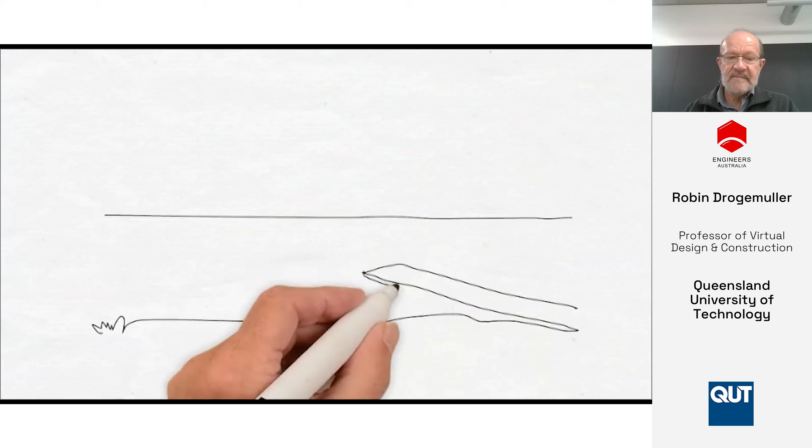Value from the customer's perspective. The continuous elimination of waste and the creation of value flow with minimal waste and without interruption. In Lean, value is always defined from the customer's perspective. In this example, the truck has no value, only the product.

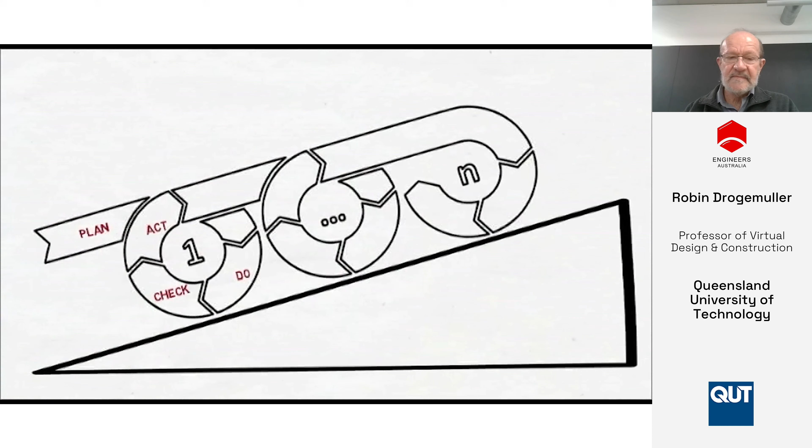Most within CIMIC will be familiar with the Plan, Do, Check, Act cycle, but many also misunderstand its meaning. I like to illustrate it like this, since within Lean you must continue to iterate through PDCA until you reach success, using standards as a wedge to ensure that your hard-earned improvements are sustained.

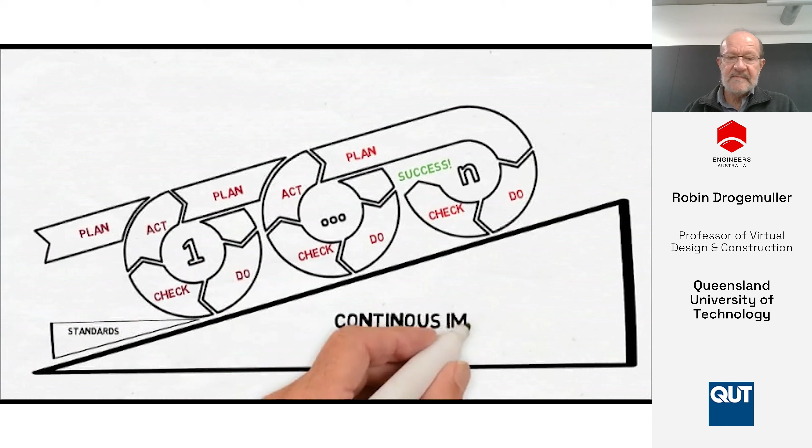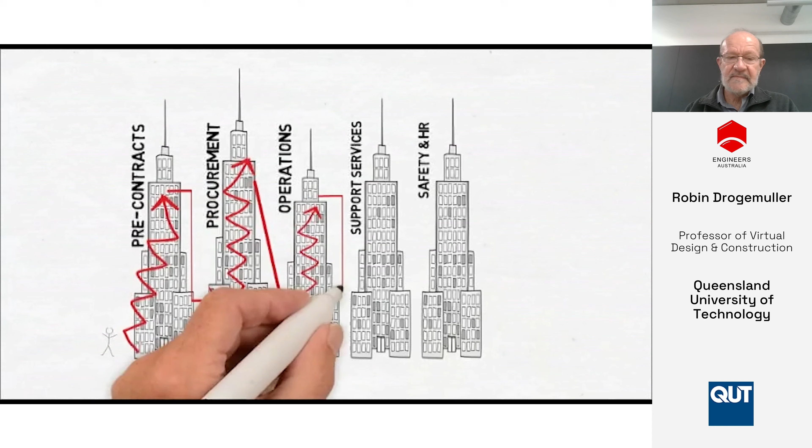Lean also teaches us to recognise that while most organisations and teams are vertically aligned within discipline-specific roles, the process is rarely contained to a single team. The flow of work or value through the organisation is often chaotic, having to travel up and down multiple structures before success is reached. Lean uses tools such as value stream mapping to streamline flow horizontally across the organisation.

Lean takes a very hard view of waste, defining it as anything that does not add value for the customer: motion, the unnecessary movements of people; waiting, time wasted waiting for someone or something; transport, the unnecessary movement of products or materials; defects, efforts caused by rework, scrap or incorrect information; over-processing, doing it better than required; and overproduction, doing it more than is required by the customer, which leads to inventory, the excess of products or materials; and lastly, non-utilised talent or wasted human potential. What's left is value.

One of the concepts Ken was talking about, the customer, can be confusing to people. With a project, the project client is a customer, the person paying the contract and the money, the project owner if that's different, then the users of the project, and also the approval, the council, local government, and the certifiers and so on.

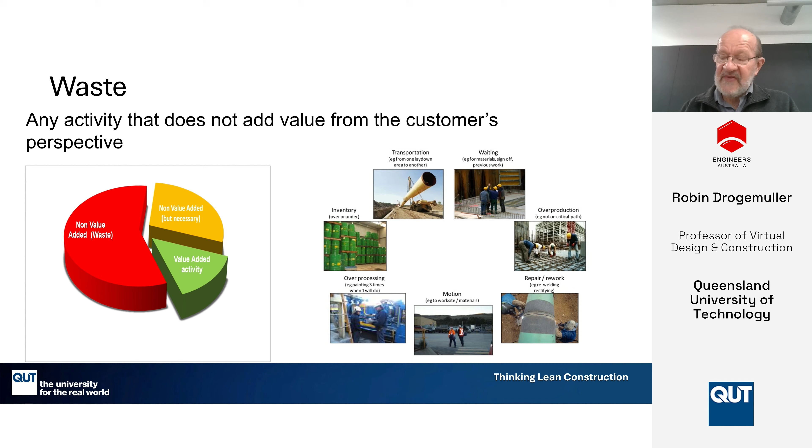The project I'm talking about was originally called Driver District Centre. It's at Palmerston in the Northern Territory, near Darwin, and we'll be using this as our initial case study. It's now called the Palmerston Senior College if you want to look at it on Google Earth.

Looking at some of the background in the Northern Territory—a very tropical environment, hot and humid. Many of the schools were designed as unitary buildings, which basically means the whole project needs to go in a single stream.

Damien Berger, an architect working with me in the NT government, designed the Sanderson Middle School. This was on a slight hill, so it was simpler and more appropriate to break it up into individual buildings. Damien did the initial design, and then Linklater Eric did the detailed design documentation on this project. This actually tested out some ideas we then had to use when we went on to Driver District Centre. I'll talk about the reasons for that in a minute, but hopefully you can see the similarity.

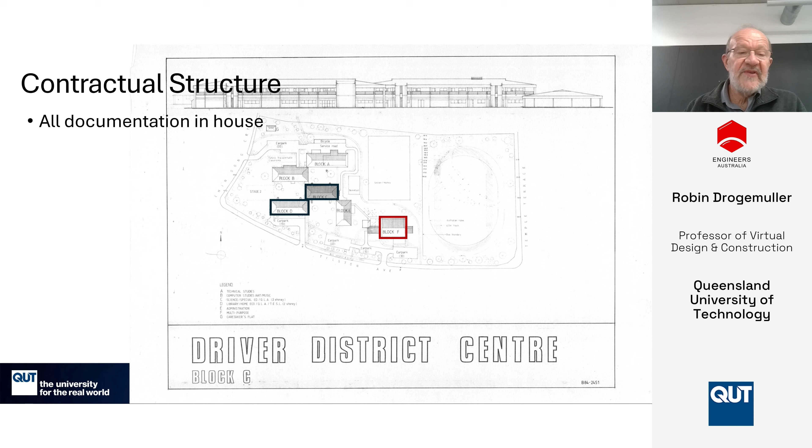All the documentation of the project was done in-house within the Department of Public Works, and the construction was done as a contractor-led project, with separate contracts for the initial excavation, site works, and individual buildings. The two-storey buildings were constructed first, then the tech studies at the back, because that had the plant for the project, then the single-storey classroom and administrative buildings. The cyclone shelter was done last.

Now, this is an example of pull planning from the lean concept, because the two-storey buildings were going to take longer to build, hence they were designed and construction was started first. The cyclone shelter was conceived as non-core - the school could function without it - and they were worried about access to adequate resources to do the whole project at the same time. So the design and construction of the cyclone shelter was delayed.

So as I mentioned, this is an example of pull planning, where you're actually looking at when things need to be done. So we started with the date for handover and then worked back on the duration of each of these components.

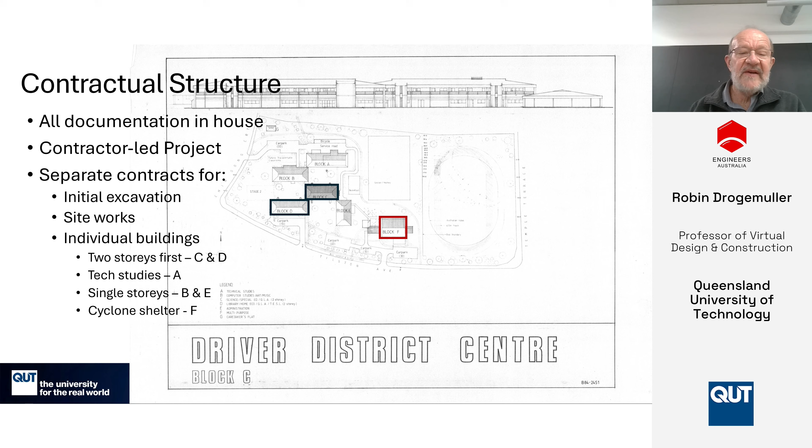So the optimisations we made - the site works, roadworks and stormwater and building platforms were all started before the detailed sketch designs were even finished. The idea was to make sure we had access to the site all the way through the wet season. So with all the roadworks and stormwater in place before building even started, we could get continued access to each of the buildings.

And because the services need to go right up to the proposed building areas, there were earthen platforms built on the area of each of the proposed buildings, with a tolerance of about 6 metres all the way around to allow for last-minute design changes. That was to provide a smooth process throughout the construction process.

So the civil projects all started in October, and the building started in around February of '85. As I mentioned, the two-storey ones were done first, then the single-storey, and then the cyclone shelter construction only started in about October of '85. That was being designed concurrently with the construction of the rest of the school.

So this is designed to break the dependencies between the different components. The handover was in December of '85. So the project was completed on time and on budget, even though we only had a 16 month construction period. From memory, there was only 1 day of delay due to rain.

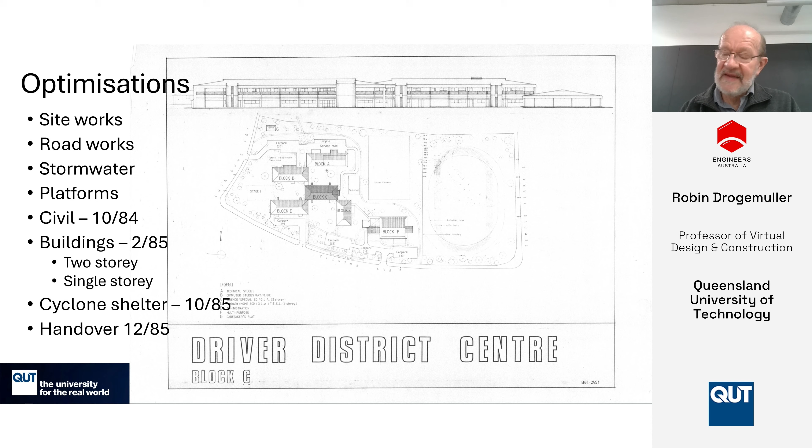We were fortunate that the wet season wasn't as bad as it often was, but the pre-planning and access through the completed roadworks assisted there.

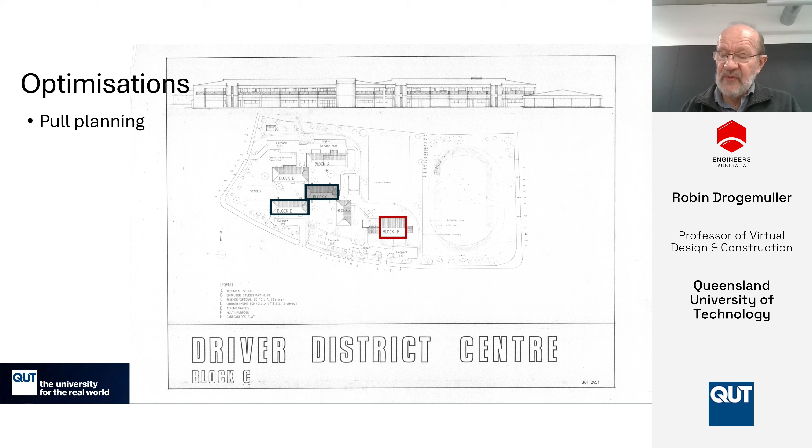And then I've already mentioned the pull planning, where we took the dates for required completion of different components, and then worked backwards from there to decide when the design work and then the construction work on each had to start. That made sure that all of the facilities required to be completed for handover were.

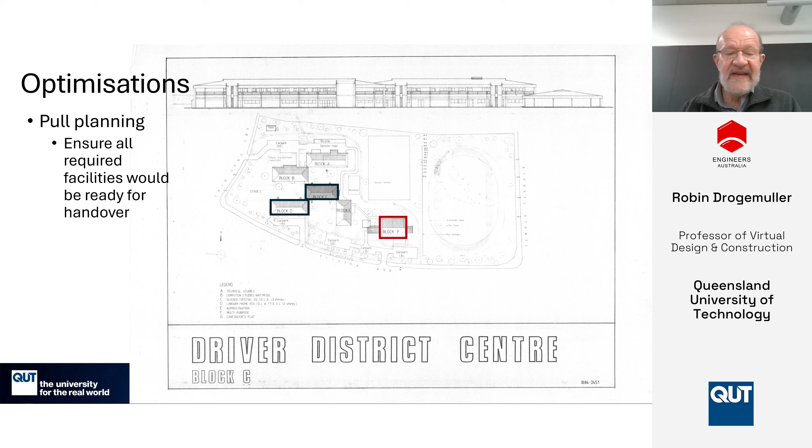When we're looking at the floor plans, I mentioned previously that a lot of the schools in Darwin and the top end were fully air conditioned. Damien Berger did the design here. The idea was to have external verandas around all of the buildings. This provided plenty of space for the students to get around, but also meant there was no air conditioning required for the circulation spaces.

Damien had some deep discussions with the Commonwealth Government, who were funding this project at the time, because the total areas exceeded their formulae. But he managed to convince them that by following this concept, you actually had roughly the same construction cost, but the operating costs were substantially reduced due to the reduced heating and cooling requirements throughout the year. So the verandas helped there.

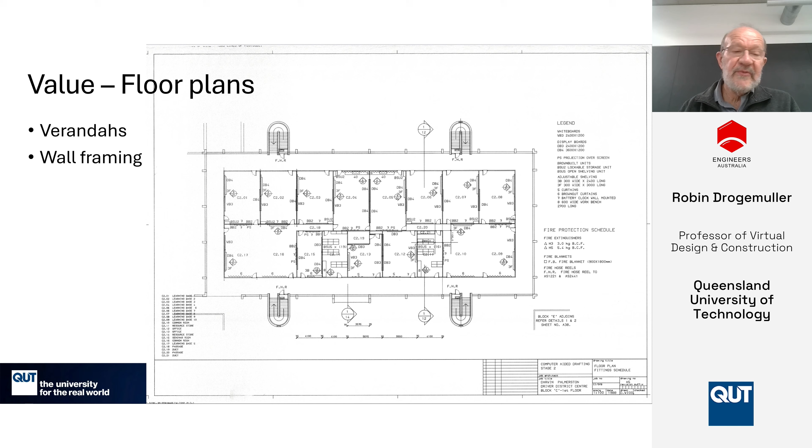Then we also - the wall framing, in a cyclonic area, you need to provide debris penetration resistance. The wall frames were just metal C-channels with 19mm compressed fibrous cement external cladding, which provided the debris penetration resistance. This meant we didn't have any wet trades for the buildings other than the wet areas and some walls required - concrete block walls required for structural shear support.

We also identified the prefab potential, so the facades were all done with glass reinforced cement panels. The top ones were a different shape, obviously, than those on the balconies on the two-storey buildings, but this allowed a level of prefabrication. We did have some issues with variation in size, but that was handled by sorting the facades to make sure the lines looked uniform.

And then we had the wall panels. There was a lot of commonality there, so that the individual contractors who were awarded the individual buildings, all tendered separately, could use prefabricated wall panels if they chose to do so.

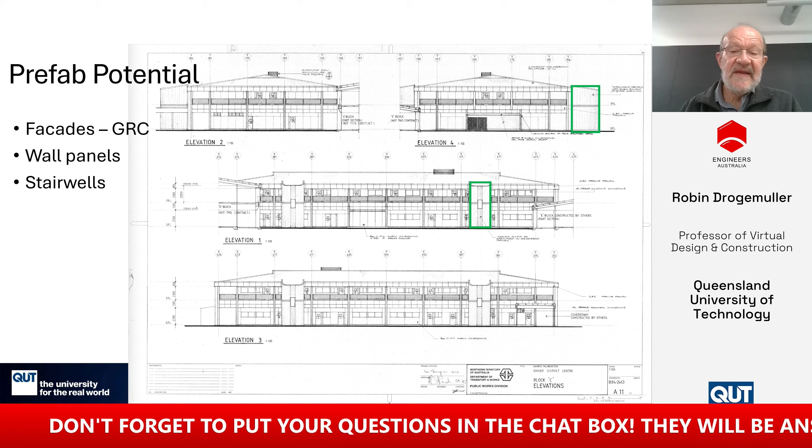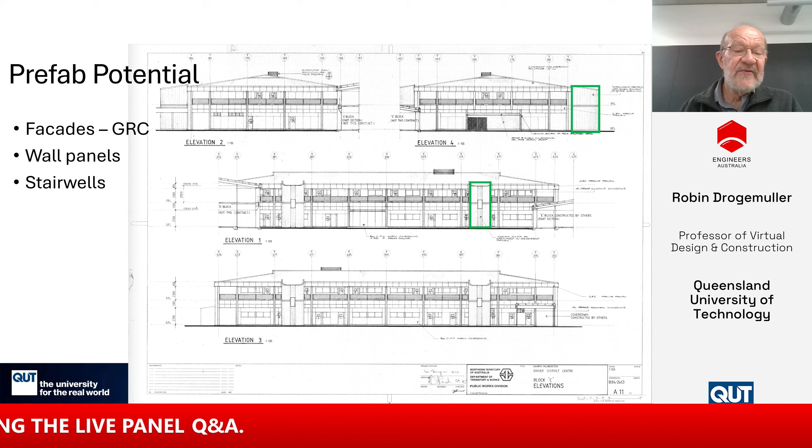Then with the stairwells, there were 8 stairwells all up with a curved shape. This was designed to allow the formwork, which was pretty expensive, to be reused as much as possible, because your formwork is 40 to 60% of the total cost of concrete. And the contractor on the Driver District Centre, because these were pretty much the same as on Sanderson, actually asked if they could reuse the formwork on Sanderson and save themselves several hundred thousand dollars.

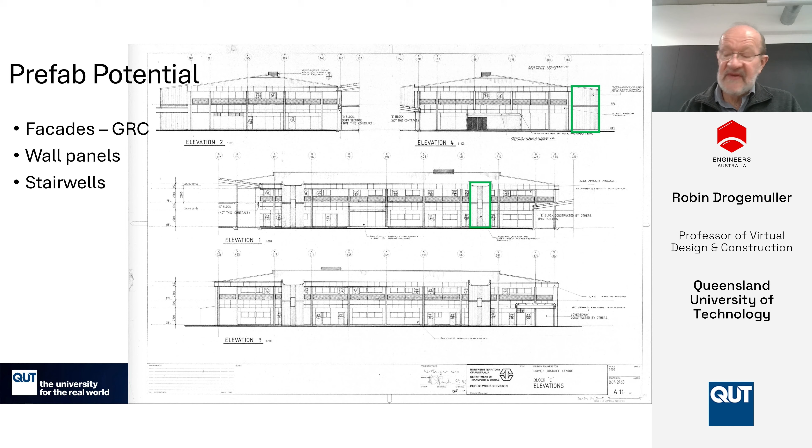Okay, the structure was very simplified. Basically, the top story of the two-story buildings and the single story buildings were just steel framed, where the concrete column on the outside of the veranda provided the major bracing and structural support. Then there were 102 by 102 RHSs in the external walls, and also underneath the ridge.

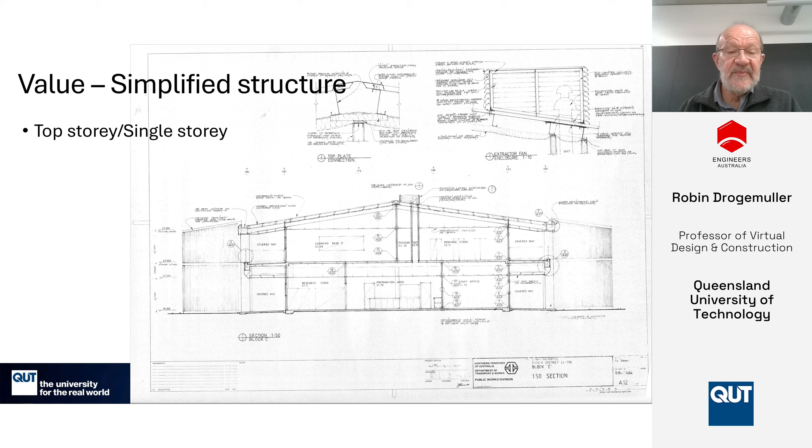So a very simple structure, very quick to put up. And then, as I mentioned, the concrete columns and steel frame. The ground floor was concrete columns, continuous with the upper floor on the two-storey buildings, with concrete beams running through on the shortest dimension of the buildings to handle the spans. There were also very thin concrete columns in line with external walls, and also one in the middle of the building to keep the spans low.

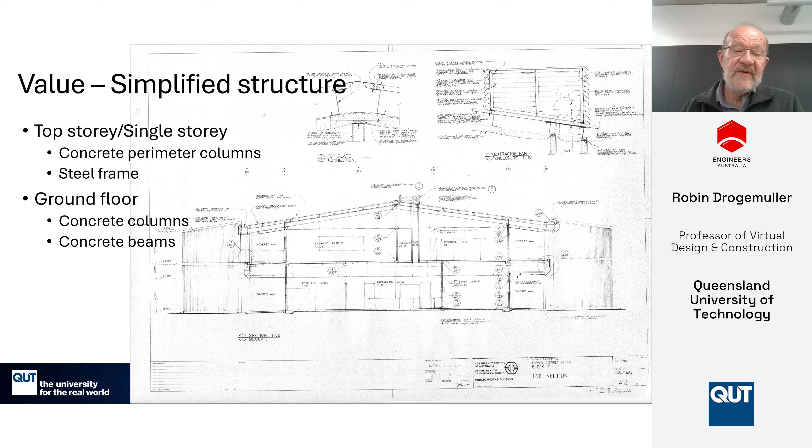So in reviewing this, we made sure we gave value to the customer. The customers got the building that they asked for and met the brief, and it looked reasonable. We took great care about making sure that everything was student-proof, and we achieved that. And as I mentioned, it came in on cost, under cost and under time.

The value stream, we made sure the construction process could continue all the way through the project. There was never any time where the speed of work on site decreased. We also ensured flow, so that when two buildings were butting up against each other, the individual contractors were scheduled to work on those bits at separate times to ensure there were no clashes. We also used pull planning, which I've already mentioned.

And aiming for perfection, maybe not, but use of the succession, where we went from single buildings that had covered everything to Sanderson, where we had external verandas, and then on Driver, the current Palmerston Senior College, we were able to optimise some of the construction aspects to make that even better.

One thing about lean construction that differentiates it from manufacturing, the other aspects of lean, is the last planner concept. The last planner is the person closest to the work who has authority to make decisions and create assignments. This normally means the leading hand on the work gangs, or the supervisor on the work gangs, who does the planning.

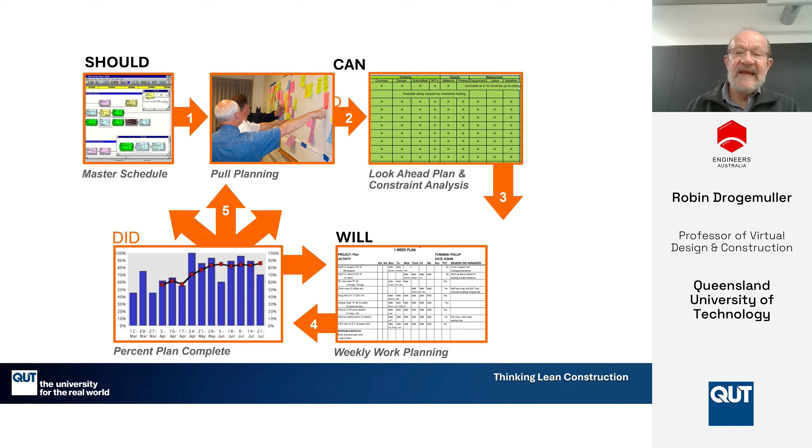Then they do the plan ahead for the week - the will planning - and then at the end of the week they review what they did and come up with the value for the percent plan complete. Here's the same concept: the should, the master planning and phase planning, is done at the higher management level, and then the weekly can, will, did process occurs within the various work teams.

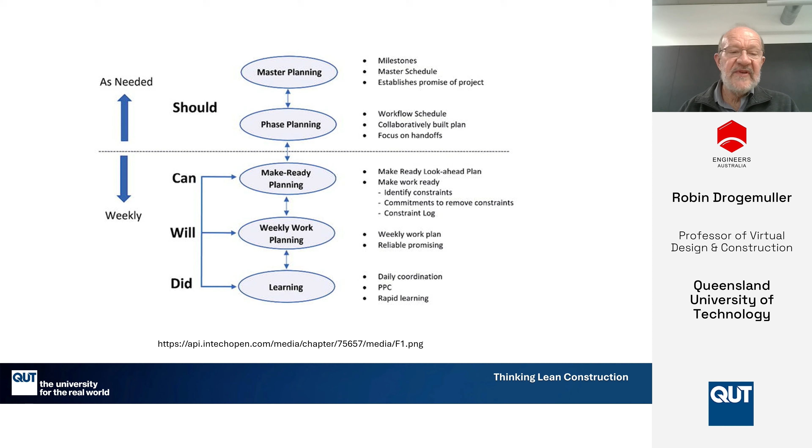And there are a whole range of lean tools. I'm not going to go through all of these, but there are lots of different methods under the lean umbrella, which you can look at and decide whether they're appropriate for particular aspects within your projects and your working environment.

So, advantages of lean construction. It's focused on the overall reduction of cost and waste, so it's a cost effective and efficient process of construction. The overall construction time can be reduced if necessary, which can lead to faster occupancy.

In school projects, we had a fixed time we had to have everything done by. If we finished a building earlier, it wasn't going to benefit the customer, so there's no point throwing extra resources into buildings just to have them finished earlier than just sit there. So we're able to optimise the level of labour and activity on site.

The lean approach also provides a deeper understanding of the process, so this fosters issues around safety on site. People don't have to rush in order to achieve things. It also increases productivity and efficiency because people aren't under the same pressure as they can be when things go pear-shaped on a poorly planned project.

And it also improves the overall project results because there's increased communication between the teams through the last planner system. And stress on workers and project management teams is reduced.

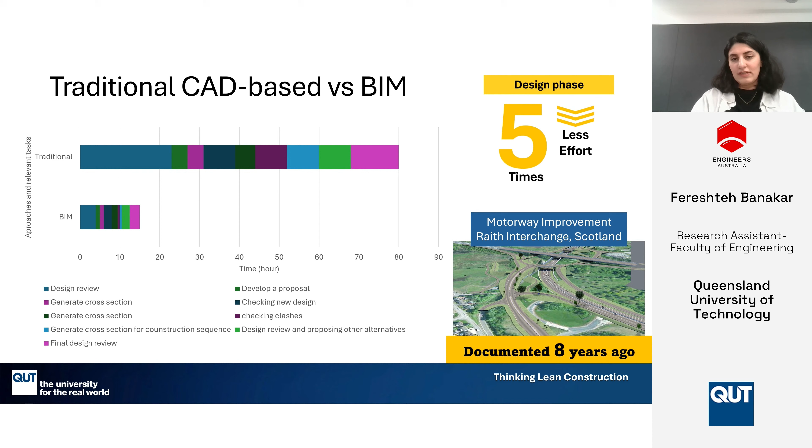We've introduced a change, and it's kind of relatively new, but not that new. And when change has been introduced, the next thing that pops up is resistance to change.

There is a quote from a politician in 1532. He says there is nothing more difficult to take in hand, or more uncertain in its success, than to take the lead in the introduction of a new order of things. And we are in 2025 and we still have that problem, resistance to change.

That's why after 12 years and 8 years, when the successful implementation of Lean and BIM in these projects has been proved, the development and implementation of Lean and BIM in the construction industry is still not well developed.

For change, we require top-down support from management, bottom-up support from staff, engagement, training, monitoring, and identification of opportunities for leverage.

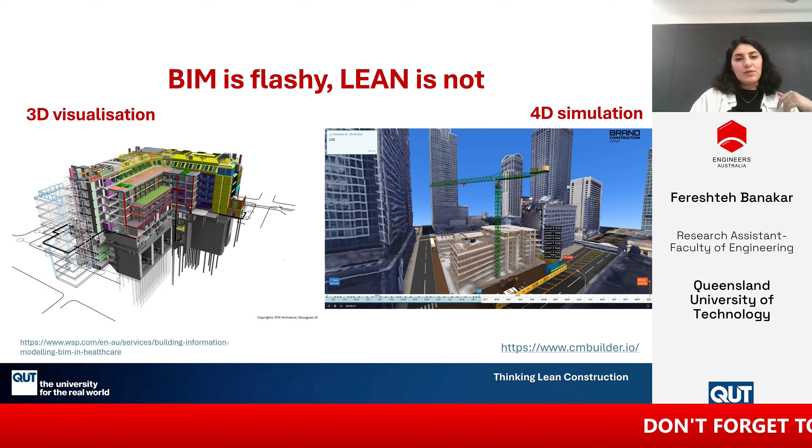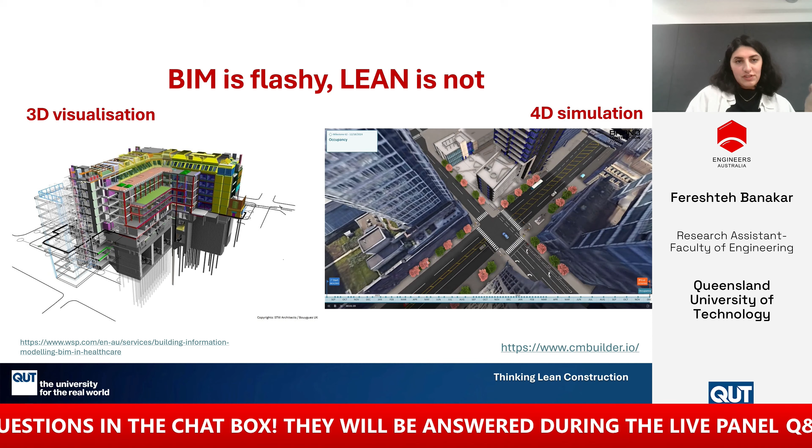BIM visualizes the building and all this information and all the elements of the building in a 3D model. You can see the building, you can see all these different elements in detail. It's interesting for your audience, and it also simulates the process of construction — it's a 4D time simulation. So all of these visually appealing features that BIM provides can help implement Lean in the construction industry as well. So we call it the BIM Lean approach.

So BIM brings the quality and productivity, Lean brings the value and safety, and both of them hand in hand bring increased efficiency in the building and construction industry.

First, we're going to talk about reducing waste and optimizing resources. Lean targets all forms of waste — time, materials, and labor. And BIM provides the digital tool to identify and eliminate those early in the design and planning stage.

Lean aims to minimize waste in all forms, directly leading to cost saving. BIM supports this by enabling clash detection and reducing rework, allowing for more accurate material estimation.

This is an example of a decision and its impact or effect on the cost associated with that decision. So with this power of BIM and clash detection, you can detect issues of any clashes happening in a building design early in the design phase, and you can make the right decision and save money.